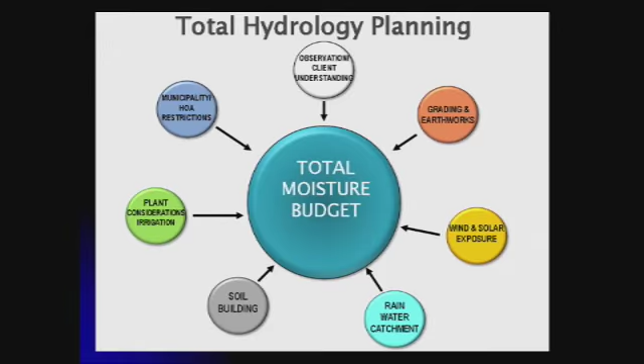Right now, in the state of Texas, you're pretty much free to do rainwater harvesting and solar panels. That used to not be the case, but HOAs do have the opportunity to say it can't go over the fence height or something like that, but it's really opened up a whole lot. And I'm going to bring together several different elements that you've talked about earlier today, but rainwater harvesting methods can use passive catchment, which has been mentioned, but maybe not as that word.

Depressions in parking lots were an anomaly 10 years ago. We used to raise the parking islands, plant trees in it, direct the water away. There's no such thing as away. Water never goes away. It just goes to somebody else. So we're now depressing little islands in the landscape. We're seeing the sheet flow of water as a resource. So I'm going to show you some tanks.

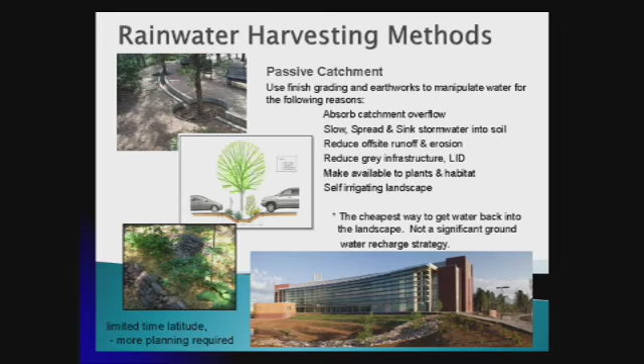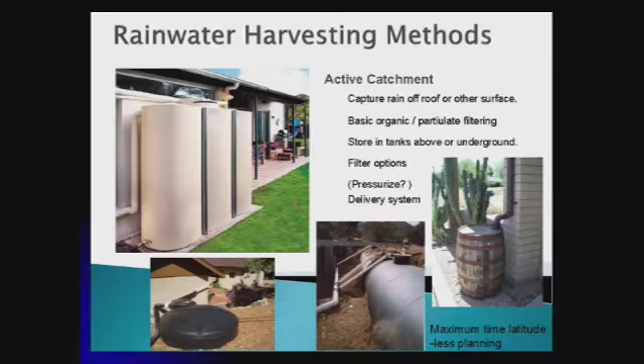But if you think about it when you're designing your landscape, you may not even have to have a cistern to harvest the rainwater. The cistern is an active catchment system. So you're going to have some place to store this, whether it be above ground or below ground, we'll discuss that. But the passive type of irrigation or catchment can be done a whole lot easier, and it can reduce the stormwater runoff that compounds downstream. Remember, it doesn't go away, it just goes to the next guy and the next guy.

And so the city has these very large stormwater detention ponds and retention areas, and that's because we don't retain enough landscape by landscape, so it compounds as it goes downhill. And 99% of city surfaces are impermeable. You can't soak the water in. Only 1% in the downtown area can soak in.

So 1 inch of rain on an acre is 27,000 gallons of water. If you have an acre of landscape that you're designing, try to make that 27,000 gallons soak in, and your water budget has completely changed. It's flip-flopped from irrigation to just catching the rain on the land itself.

1 inch of rain on a 1,000 square foot roof area can store 600 gallons of water. So we can quickly put it into a cistern, but remember, overflow: if the cistern is full, no matter how many cisterns you put in, if they're full, the water is still going to go where it was going to go before you put in the tanks.

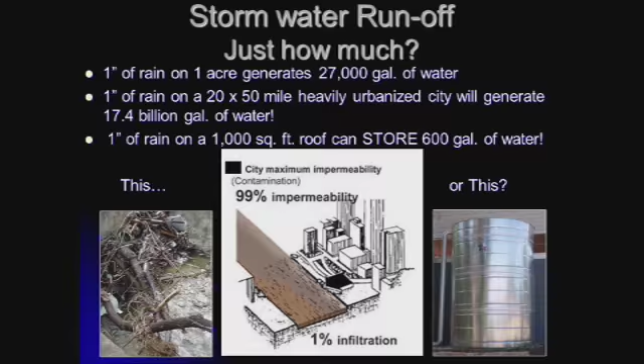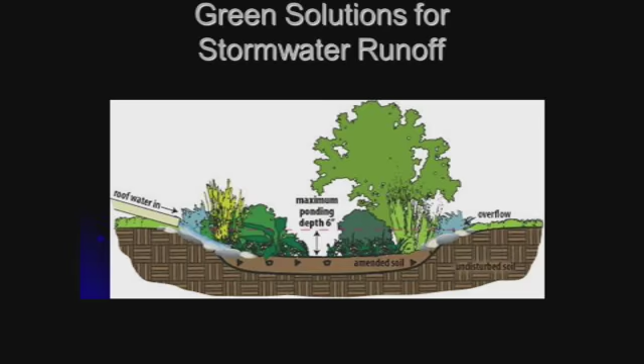Green solutions for this are rain gardens. You've seen some examples of this. There are designs on the internet that help you design these. It's specific. You want to disturb the soil, put in certain things so that the water will soak in a lot easier.

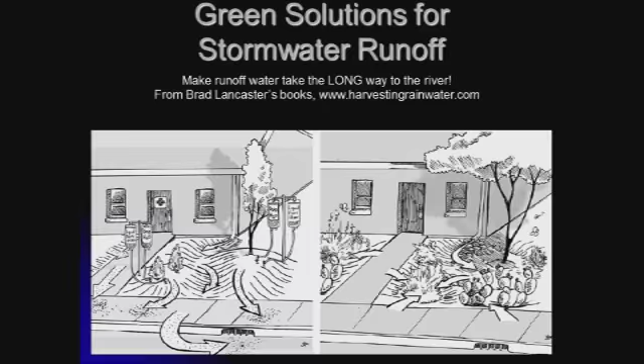But this is Brad Lancaster's drawings showing a landscape on life support, basically. If you direct the water away from your landscape, then you've just got to replace that water. Whereas if you design the landscape so that you're capturing it around the planting areas, you can reduce your paid-for irrigation considerably. And we're seeing some of that here. You saw an example. It's Big Stacy Park at One Texas Center. This is the evolution of the revolution that was started before.

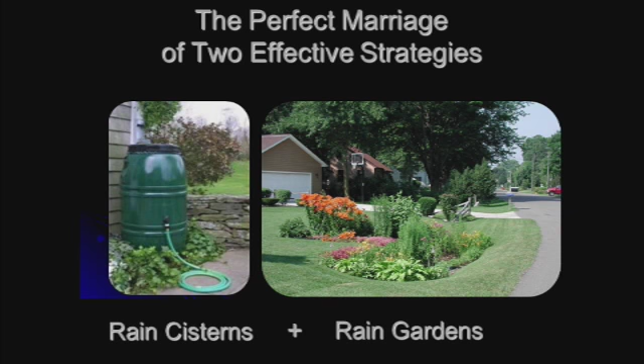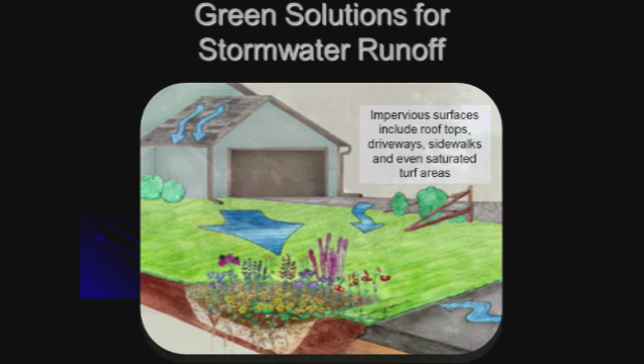So you can use rain cisterns to store it, or you can use rain gardens. If you take a rain garden, use this guide that is available to you for rain gardens. Might even be in your handout packet that you'll pick up as you exit. But it's not really a revolutionary change. You just look at a depression in the landscape as a resource rather than filling it up. If it's already running across the surface, then use that area or start a new area.

And when you change the landscape a little bit, make a little depression for that to go in, you have seen this before if you've gone to Schulenburg or Fredericksburg and you drive by the old cemeteries after a rain. And in the bar ditches, it just blooms. But without rain, it disappears. Now, if you irrigate these areas, you're kind of wasting a little bit of money. But in the old cemeteries, what escaped the plots ended up in the bar ditches, and that's where we get the best plants for the rain gardens. It's the ones that happen in nature.

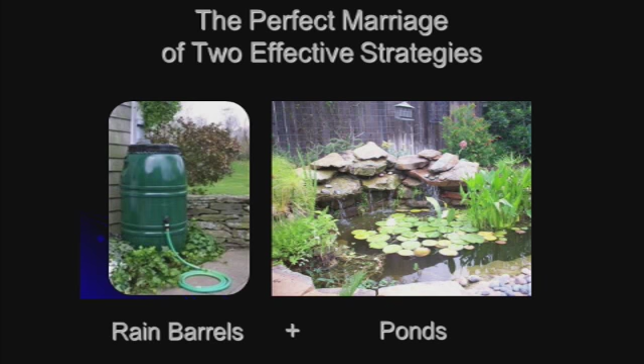Another marriage that you can do in your landscape designs is if you're doing ornamental ponds, if you use rainwater harvesting to fill your ornamental ponds, and you do not add chlorine to your rainwater, then the city will give you a pass on your ornamental features because they're running off of rainwater and not off of city water.

To give you a ratio to think in your mind, a little 10 by 10 garden shed that you may have in your backyard, that's 100 square feet. And in a 1-inch rain, that's 60 gallons of water. So if you put that in your mind, you can do any size calculation. You can do 1,000 square foot roof area, and that's the shadow of the roof, not just the square footage of the house. If it's 2-story, 1-story, if it's pitched like this or pitched like this, folks, it's the same amount of rainwater. It's not going to make any difference as to how much water falls straight down.

So there's a house being built here in Austin now on Loop 360 and 2222 that's 27,000 square feet. That house only has 60,000 gallons of rainwater harvesting. You know, it could harvest enough water for a neighborhood.

Typical system, you can get online and find out different ideas of how the different parts you're going to put together, how you're going to get this $5,000 from the city of Austin. But you basically are going to have the number one thing, and that's rain.

Okay, people say it's not raining, we can't catch water. Well, it has been raining lately, and my phone rings off the wall when it's raining. When it's dry, I can't find a customer anywhere. Wait till it rains, they say, I wish I had that water. You know, it just seems to work in reverse.

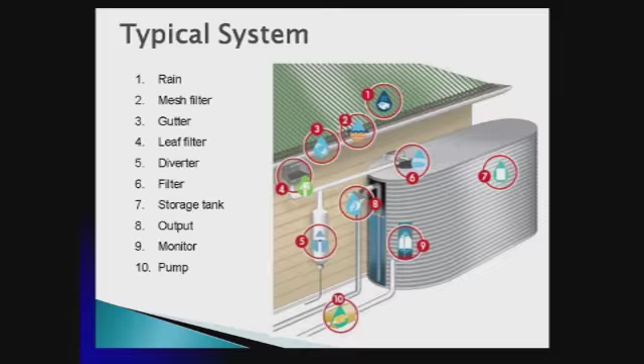So many of my clients are doubling the size of their capacity, and I'm saying there's no such thing as overflow. If you've got rainwater tanks that are overflowing, you just don't have enough tanks. So put more tanks in. Tanks come in all different shapes and sizes. You can pretty much meet any restriction that you might have as far as space restrictions. I'll show you a little bit.

The components are very simple. This is at House and Earth, just kind of down the street on 5th Street. But you just need something to kind of keep the leaves out, and you're going to need a first flush filtration device, something pretty simple. We're going to see a little picture here.

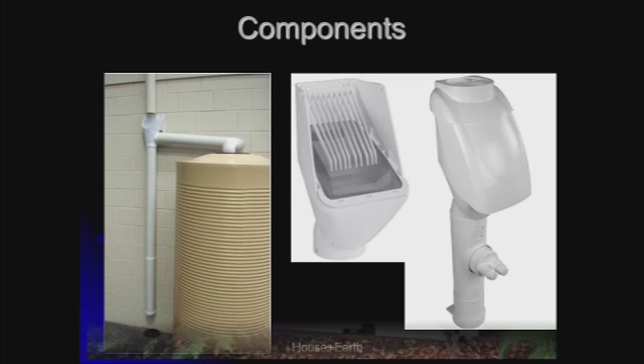I put 10 of these along a fence row. I live in a garden home community where there's only 5 feet between my house and the property line. So I put 10 of these along the property line, and I can still walk along. They're 62 gallons apiece, and they hold 620 gallons. I got a rebate from Round Rock.

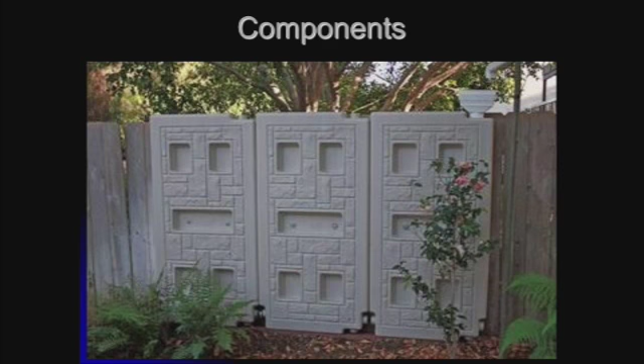And believe it or not, I can buy those cheaper from one of the big box stores than I could from my wholesaler. And it'll be delivered right to that store, and I can pick them up there. So don't think that you have to have a wholesaler's source to get some great tanks.

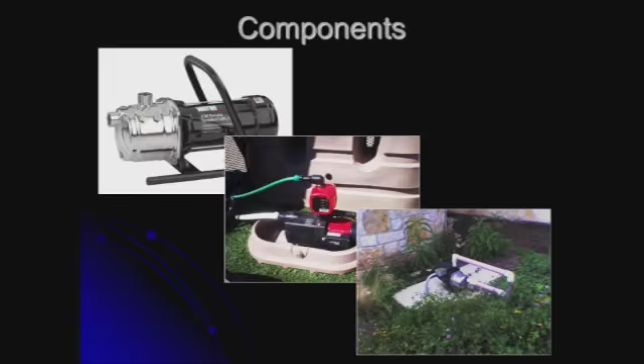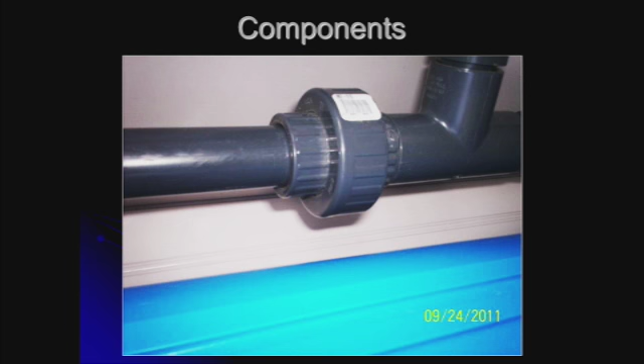Components, if you decide to use pumps, these are available all over the place now. Both cheap ones, throwaway from China that are cast iron, and expensive ones that are stainless steel. So you've got a price range in there to use for your pumps. I would remember that there is this little device that allows you to take these apart and put them in your garage for the winter, either that or maintain your pump house with some sort of a heater or a bulb or something like that in there.

Now, if you do use a pump in the city of Austin, you are required to put in an RPZ. This is a reduced pressure zone device. It is a high hazard device. Rainwater falls from the dirty old sky, and so it's considered to be high hazard. I do have opinions that may come up in this presentation, but that's what you've got to have at the street, protecting the city's water supply from rainwater if you have a pressurized system.

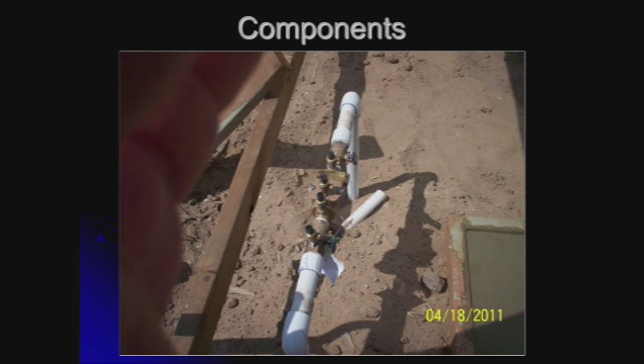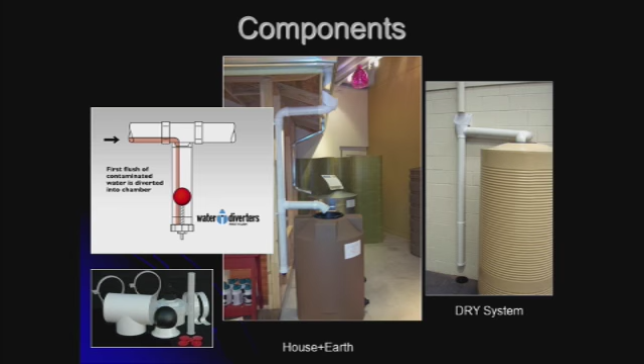Every once in a while, you have to take it apart and get the leaves out of there. But this shows a very simple system. The one on the right is referred to as a dry system. In other words, the rain is going to go down, fill up the first flush filter, say that very fast, and then go across and go into the tank. Once the rain is over with, the system is dry. The first flush filter even drains out, so it's dry. I'll show you a wet system here in a minute.

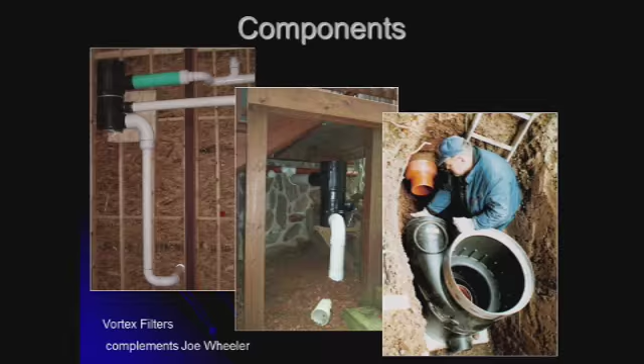These are very large separators. These are called vortex filters. They were first invented in Germany. And you see the one on the right, that gentleman can have a very large one. That 27,000 square foot house, I called up Joe Wheeler and I said, we need the largest separator you have to get the debris out of a rainwater tank. And he said, oh no, that's for a 30,000 square foot commercial building. 27,000 square foot house, I don't care, same thing, so that's what he put in. It's bigger than that one, but we did put that in that house.

Components. A potable water system is different from a landscape system, and you're going to filter the water, either 2 or 3 filters there, but you're getting the water as clean as possible before it goes into either that horizontal or vertical. You see the vertical stainless steel one. That's where the UV light is. So the light is always on. The water turns on in your faucet. The water passes through the UV light. It kills the bacteria. But if you have a particle floating in there and the bacteria is behind that particle, it will not kill that bacteria. So you want it as clean as possible going through the UV light.

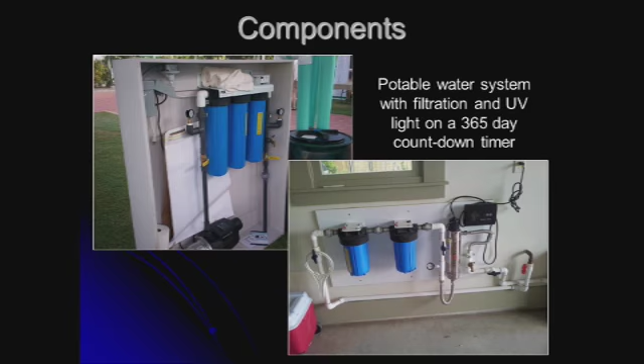The box there is a 365-day countdown clock. When that reaches 0, you replace the light. You've now got a pretty easy, serviceable system.

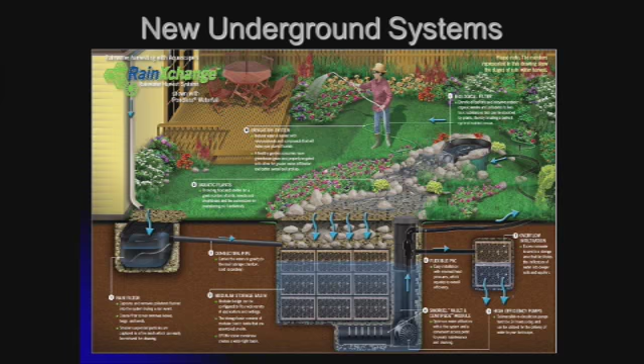Underground systems. These, I was talking to somebody a little bit earlier, these can be very thin. They actually make these cages as little as 9 inches thick. They started in Australia. But you can put these cages together in basically a pond liner and put a rainwater tank underground, and it just kind of disappears. And in Australia, where they were first done, they had parking lots with 18-wheelers parked on top of these plastic cages, but it can be done. So no matter what space you have, these are available to use.

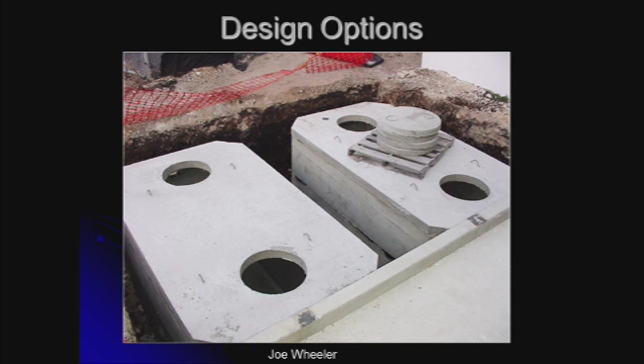In some cases, I've been able to use concrete septic tanks. If you're going to go underground, a place in Kyle, I believe, makes custom septic tanks, whatever size. I've put them like railroad cars before. So we can use a septic tank and put rainwater in it, and it does take a big crane to bring one of these in. But you tell them where you want the openings and how you're going to do the overflows and all of that, and you can use the concrete ones.

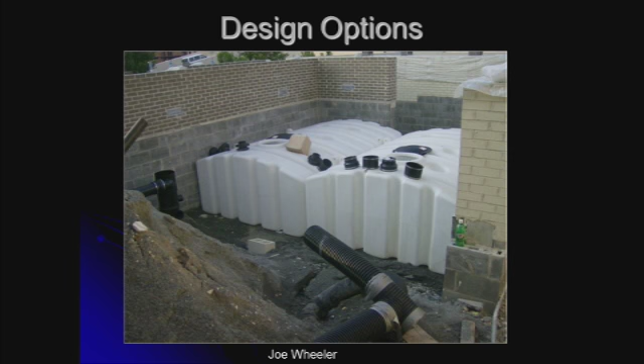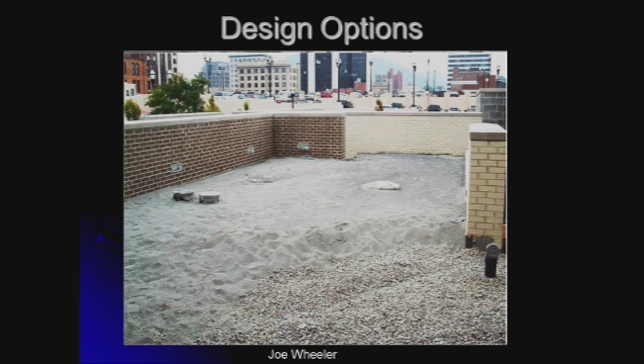This one is plastic septic tanks. Even though they were originally made for septic, you can actually see over on the left one of those vortex filters getting ready to go into there. But once it's covered with gravel or planting areas, these just disappear. You don't see them. This is great where you can dig. If you can't dig, figure out something else, because I once went to a large project underground and the hole cost $27,000. So that's digging in limestone. You don't want to do it unless you just have to.

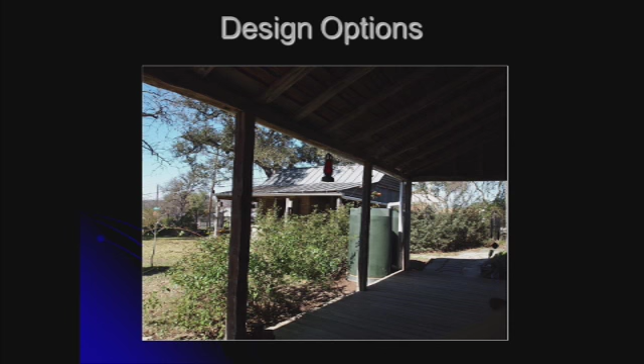What we did is we put some of the rainwater tanks, plastic ones, behind roses. So this is actually sitting on the front porch looking out towards 49th, corner of 49th and Sinclair. The old stone kitchen is over there. But we kind of hid some relatively modern plastic tanks, polyethylene, behind some roses, but it still worked. Where they needed to walk to a place where they parked their cars, kind of a carport garage combination, we needed room. So we used 2 of the kind of oblong tanks in tandem, but those are going to be more expensive.

And notice there's kind of a hole in the center of one of those. As they get bigger, you may have seen pictures of holes in these oblong tanks. Those are called kiss-offs. That's where they have cast it with the front and the back joined together with plastic, so when the water goes in there, water wants to be round, so it's constantly trying to expand those, so those kiss-offs hold them together.

But these were more expensive, but that's the space that the people had to walk by. And you see that as a dry system. The rainwater is going into the top of the tank, and then the overflow is actually going in under the rock pathway.

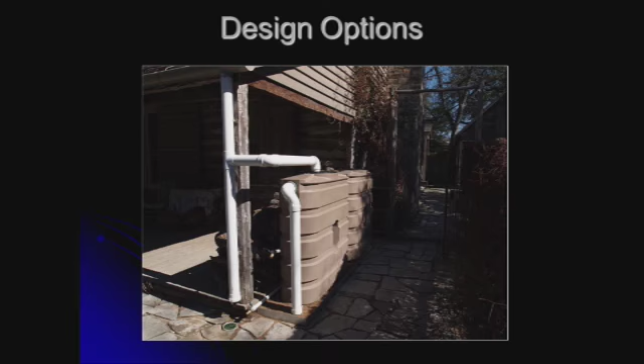Also in front of what was a corn crib many years ago, it's now a guest house, we put 3 in a row along their parking area, but there is a barbed wire kind of fence there, and I propagated some of my antique roses, and those will now be covering those, so you won't see them from Sinclair. They're still a little bit visible from Sinclair right now.

This one has a combination of a dry system and a wet system. You can see the dry system going into the top of it. I'll show you in a diagram a little bit later the wet part of that one.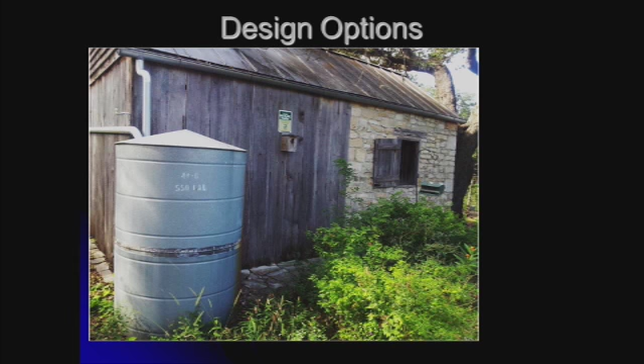This is the original tanks that were getting rusty after about 25 years and rusting out. So we replaced it with a new metal tank made with the same rollers that are 100 years old that are now down in Dripping Springs. It was called Texas Metal Cisterns, and now it may be called Texas, thank you, dear. Yeah, Texas Metal Tanks. They just change their name every once in a while. When somebody else gets the rollers, then they change them. But notice they're exactly the same.

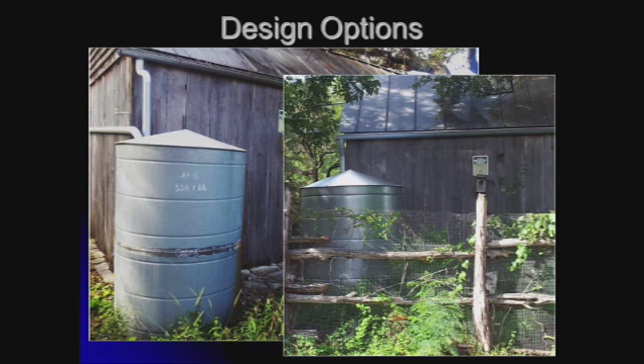I'm going to show you a little bit later a map or a plan of this, and you can see these from the street if you want to drive by. This is at Mueller. This was the second rainwater system to go in at Mueller. It was rebated by the city of Austin.

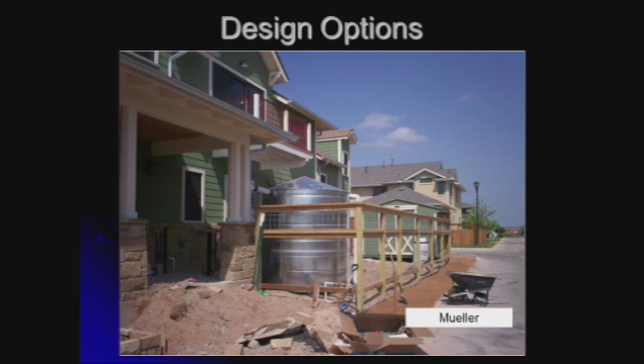It has a dry system. Notice that the pipe goes down to the ground. That's where the first flush is. When that fills up, then it goes across and it goes into the tank. If the tanks move any, you don't want a rigid connection, so that's why they use those black things there. Plus, if a kid comes along and says, I bet you I can chin on that, then you can replace it easy, because I kind of hate those unless they're really hidden away from the athletic kids.

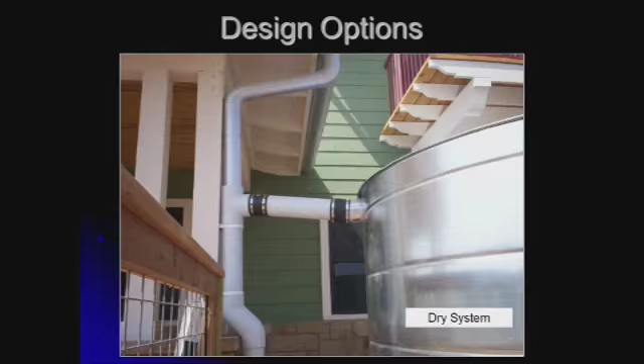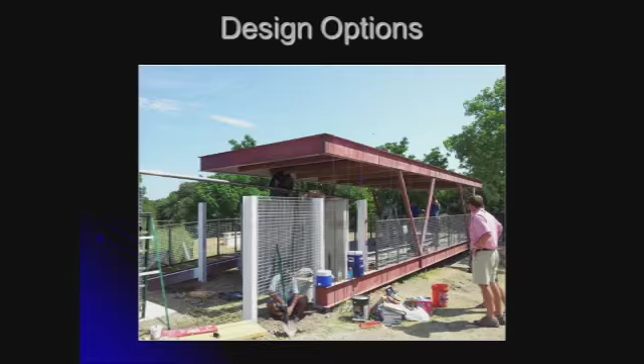Design options. Here's one at Casis Elementary School, garden classroom. This is a great classroom that was built outdoors, all with donations. One thing for you landscape folks, notice that rock wall in this design. Actually, that is metal on both sides of metal uprights filled with riprap. So it turned out to be cool. And it's at the right-hand parking area of Casis Elementary School, and that riprap looks just like they had a rock wall put in. Sorry, I'm hitting these too fast or too slow.

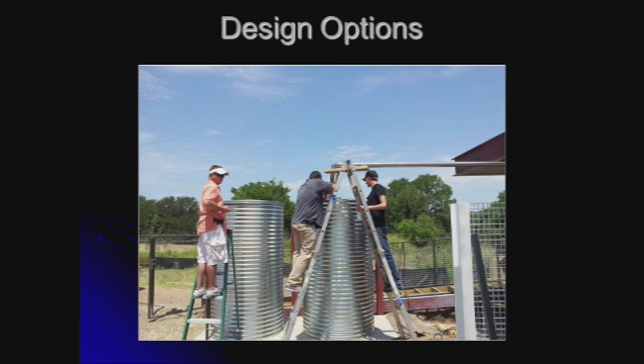But right next to there, they have two 600-gallon metal tanks. Now, these are corrugated horizontally, but they're made, like up north, they're silos. They were grain silos converted to rainwater harvesting. Several companies now do this, and these stand on their own. They're structural. They don't have to have any ribbing or support. There's other brands that have to have an outside frame on them that are metal. I don't like them. I like these because they stand up on their own. Pretty expensive, but this particular company is bringing them in Austin in truckloads in a couple of different sizes.

This is a 24,000-gallon tank out at a ranch at Medina, and they bring all 24,000-gallon ones in a truckload. So a 24,000-gallon tank, 24 feet in diameter, a little bit above my head height at the eave there, 10-degree pitch. If you're willing to take this one, instead of this one being about $23,000, it's $15,000 erected on your slab in Austin. So instead of waiting for a conglomeration of different sizes of tanks, get this ranch tank and you save. They also have a 13,000-gallon one that they bring in, but it's $13,000. I'd rather pay $15,000 if I've got the space. Space considerations are always important.

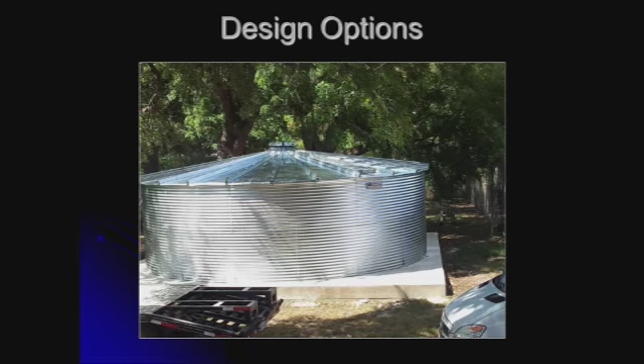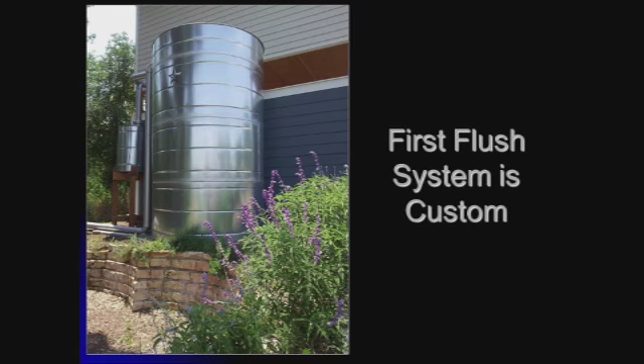First flush system, in this particular one, this is Las Casas Verdes off of William Cannon and Westgate. And that's a very green community, been on the solar tours many times. But he had first flush filters made out of metal from the same metal rolling guys down in Dripping Springs. They were in Kyle at that time. But he had to seal that thing up so that it will hold water. So he did have problems with that, but he wanted that look, so that's a very custom first flush filter.

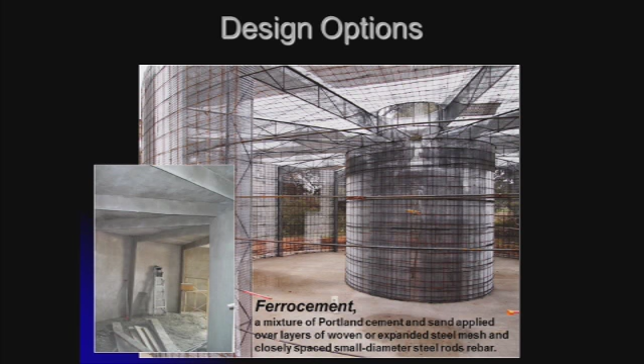These are the same folks that had the log home in Rosedale. They had this other log home in the Liberty Hill area, and they actually had it beforehand. And we put two 50,000-gallon ferro cement tanks out there at this site. Ferro cement is how they build ships. If you Google ferro cement, half your hits are going to be to the northeast yacht places, so you can either buy a yacht or you can have a rainwater tank built. Same kind of stuff. They used them in World War II for battleships.

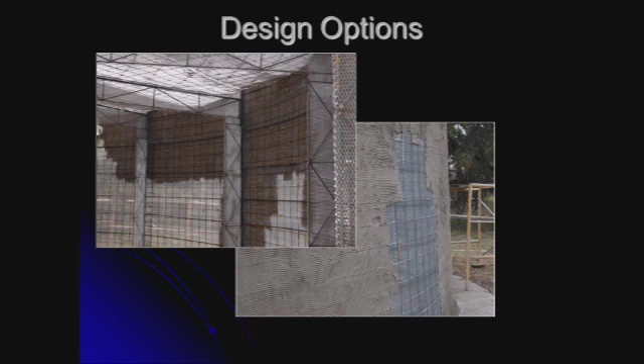This just shows how they're done. The one on the right is one that was partially excavated and then the soil was brought back up to it. I've seen one of these with a putting green on top of it.

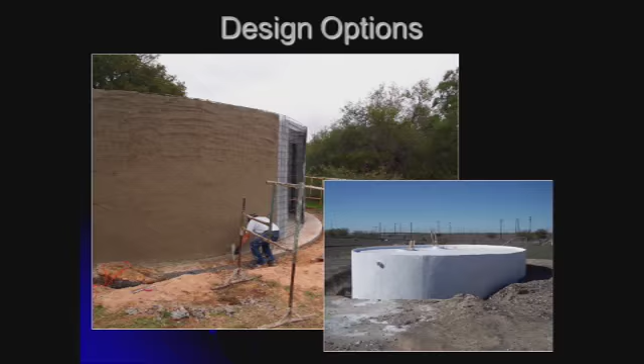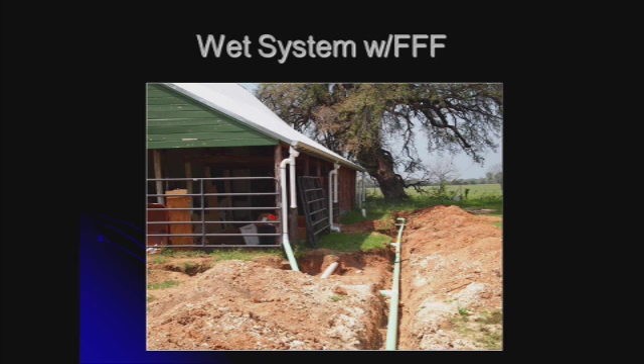This is a wet system, so this is the water that's contributed to those tanks coming off of one of their sheds. Each one of those three, as you go back towards that tree, has a little first flush filter on it. If you join them together before the first flush filter, you can have a larger first flush filter on the tank. So you've got choices, either at the site of collection, going into a pipe system. The pipe system then goes over to the tank and back up into the tank. So this is a wet system. Everything that's down in the ground is wet until you drain it out. And it should be drained out between rains because it can turn brackish pretty quick.

There was some talk about gray water and gray water use. The problem with gray water is you have to use it within 24 hours or it becomes black water, and black water is what stinks. So you can't store gray water for a period of time. So there's a little bit of a problem in using gray water if you're not using it quick enough. It's not going to smell very good.

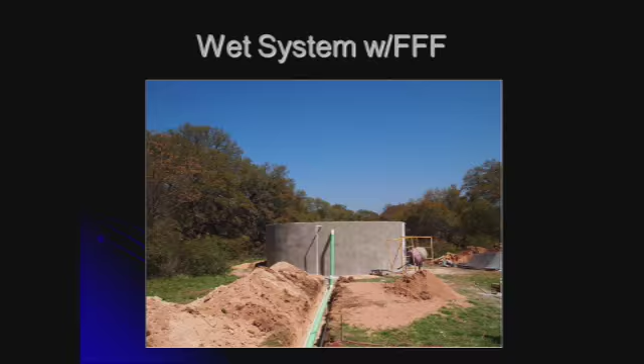I'm retired from Austin Energy Green Building, and one of my green builders called me out for a consultation, and he was walking around the side of this brand new house in Rollingwood. They were required in Rollingwood to do 2,500 gallons of rainwater storage. Never heard of it before, but they were on a creek and they were required to store it. He said, okay, we're going to put a tank here, then we're going to build a big rock wall that matches the house in front of it so it blocks it from the neighbors.

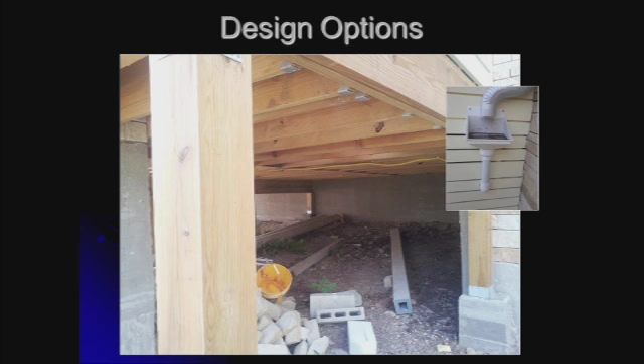And I'm walking down this little hill and I turn a corner and I said, what are you going to do under the deck? And he said, oh, don't worry about that. The tank goes here. And I said, wait a minute, no. What are you going to do with the deck? It's just empty space. It's worthless. I said, well, no, not really. There's something called a bladder that you can have custom made. The first one was called Original Rainwater Pillow, and they use them in Iraq and Afghanistan to haul water around in the back of trucks.

Put your phone down and quit texting. Listen, I'm telling you about this rainwater system, you need to put your phone down and quit texting. He says, I already ordered it. So he was texting back and forth with the owner of the Original Rainwater Pillow Company, and he wasn't really texting and ignoring me. But he had it ordered before I had all the words out of my mouth.

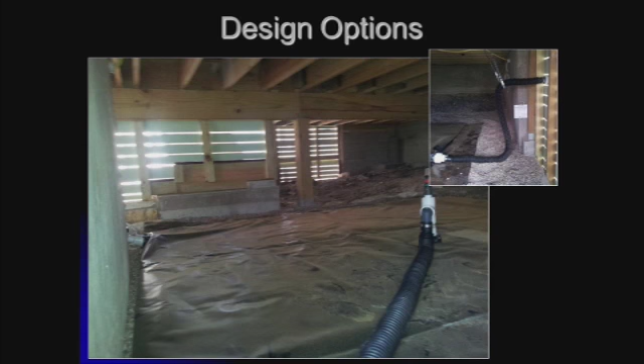And it fit underneath there. It fills like a bladder. It's like a pillow. Fills full of water, goes back down. Fills full of water, goes back down. Didn't have to build a rock wall around it. Used the wasted space underneath. Cool system.

How am I doing on time? Five minutes. God.

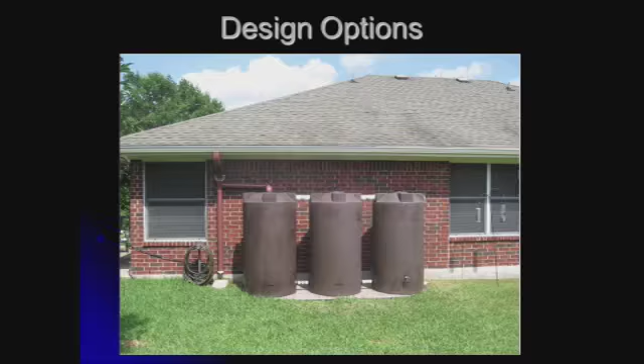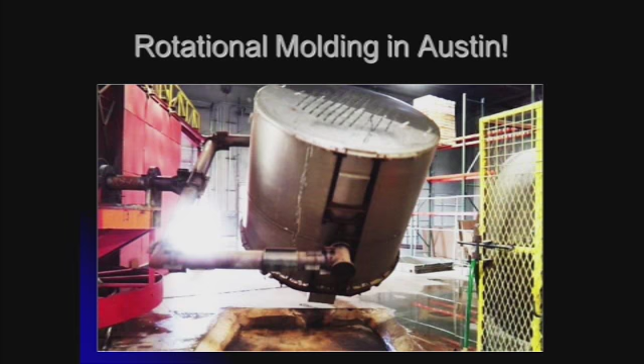I got to get to the 5,000. Okay, rotational molding. They let me take a picture of the rotational molder. They wouldn't let me show you the video. It's cool. It's out on Bratton Lane in Austin, but they're making tanks up to 2,500 gallons right now. They're putting a new arm in. They're going to be able to do up to 10,000 gallons here in Austin.

So here's the lady we were talking to about the little rain barrels. Here's the way you do this. That's 100-gallon tanks. It's cheaper to buy these tanks at some place like Tank Depot or Tanks for Less because they're made in Austin. They come in all different sizes, all different colors. We even used one for a first flush system.

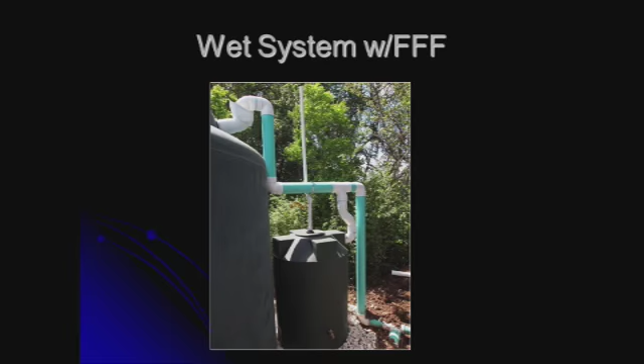Notice that central pipe sticking out the top. Remember I said that metal tank had to be sealed. This has to be sealed too. But that pipe going up allows the water to rise in the little pipe. So we can use a little small tank there for our first flush system for this 5,000-gallon tank here.

Non-potable system. This is in the city of Austin. Notice there is a high-hazard backflow preventer. They were going to use this water inside for flushing toilets. And they still had to have an additional RPZ going right into the house, not only the one at the street, but they also had to have this one.

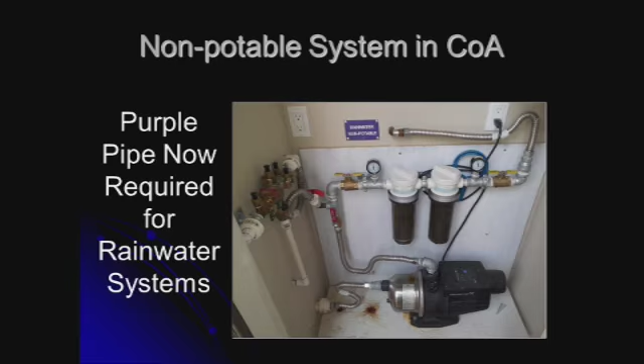Here's your $5,000. If you're not putting rainwater tanks in your landscape designs, you're giving away $5,000. $1 a gallon is available from the city of Austin for a pressurized system, 50 cents a gallon for a non-pressurized system. You have to dot the I's, cross the T's, fill out the application before you make the purchase. Get together with your homeowner.

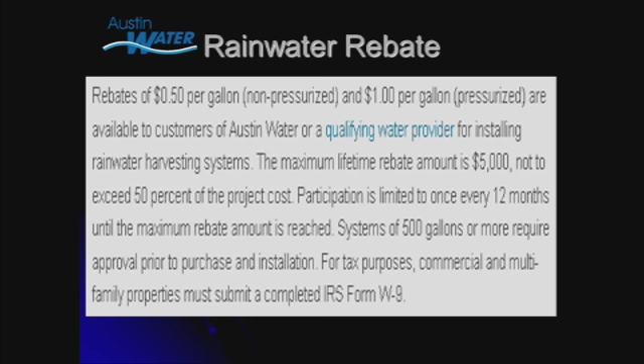You may not make $2,500 profit on a small landscape job, but you can add a rainwater tank in there, and the city will pay you $1 a gallon or 50 cents a gallon. So you can walk away with double your profit, maybe as much as $5,000, because it goes up to $5,000 per household at 50% of the cost of the system. So basically, a 5,000-gallon tank gives you $5,000 to work with and up to $10,000 to spend to get the total $5,000 back. There's additional requirements.

You have to submit a site drawing. This is what I used for the rebate of the log home in Rosedale. And the one on the left that shows 3 little circles, that's those 3 that you saw. I'm actually getting water off the front of that building and going wet to those tanks, and off the back of the building and going dry into those same tanks.

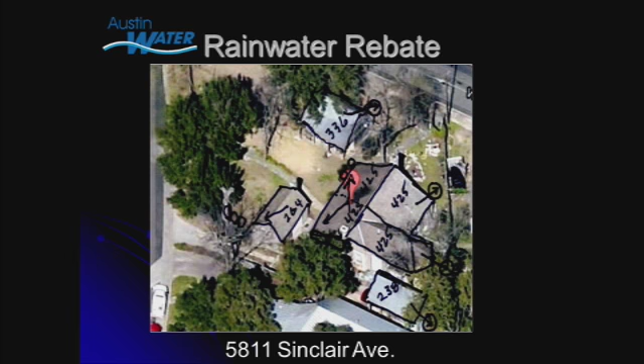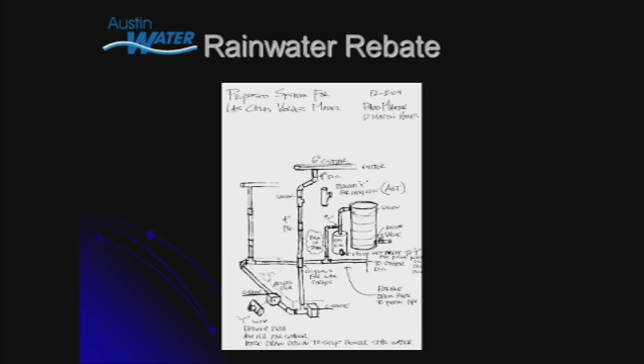But each one of those roof lines, I was able to show where I'm going to concentrate the water for 4 metal tanks, the 2 oblong plastic tanks, the 2 round tanks in the front, you can barely see the circles there, and the 3 in front of the corn crib. And then the 336 is the metal building, the metal one that you can see from the street on 49th Street. This is right by Rosedale School off of Burnett Road. You also have to show a little bit of a diagram about how the water is going to go. Water does flow downhill, but the city wants to see a little bit more information in there.

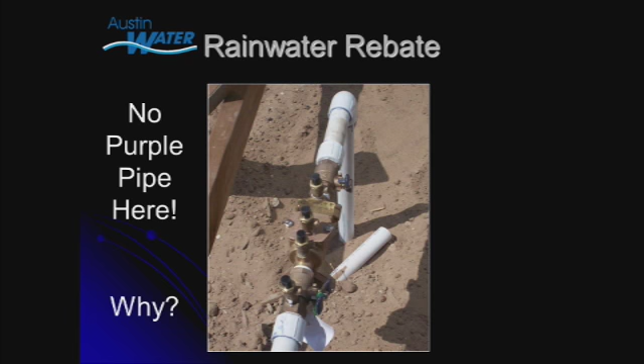Pressurized systems, you have to use the RPZ. No purple pipe right at that location. Now, we talked about purple pipe. Why is there no purple pipe right there? That's the city water. So that's out at the street coming in to an RPZ. That's potable water. So then when it becomes rainwater, it's considered non-potable, so you have to use the purple pipe.

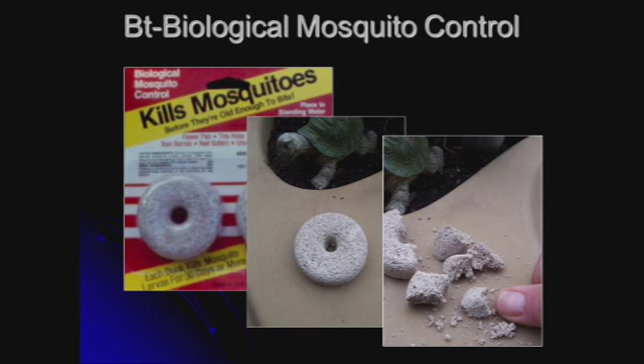People always ask me about BT or some way to control mosquitoes. That's my thumb. I take those, throw them up into the gutters. My neighbors think I'm crazy because I'm going around the house doing this, picking flies out of the air. A little bit in a tank. One large Lifesaver covers 100 square feet of water with BT on the top for 30 days if it's not interrupted by rain. So you're going to have to occasionally put BT in from time to time.

How did I do? Anybody have any questions? I did go through that fast. I did show you how to get $5,000. I'm going to put this back in my pocket, though. Yes. They change it from time to time. So in what way did they change it recently?

The most difference was they went up to $5,000 per household, and you can dip as many times as you want to get that $5,000. So you could do a job for somebody and say, let's get $2,500 from the city, and we'll go back and get $2,500 again. But I urge you, if you're considering it, to get it in there, get them to say yes on your system, because city council session is going on over there right now, and you can hear them talking about cutting rebates or whatever. So get in there and get it while you can.

Good question. What to do in freezing weather? Your dry system is going to be dry, so there's no problem with that. The first flush filter is going to drain automatically. There's no problem with that. So the only thing that you have that might have water in it is those buried lines underneath a wet system. But I recommend that you drain those between rains because they get brackish pretty quick. It's a smaller volume of water, and you'd then be pushing brackish water into your tank.